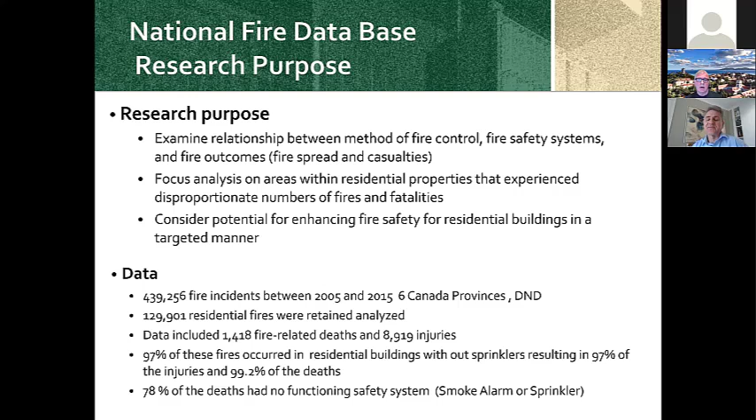The National Fire Database, for the most part, the data dictionary, a high-level report, and a sustainability plan for the next steps of the project, is on the Canadian website for Statistics Canada and can be downloaded. If there's interest for access to that later on, I can share that with Boris based on the questions.

So what we're talking about here is large wood frame residential buildings. In 2009, the province of British Columbia adopted and advanced a building code amendment to allow 4 to 6-story wood frame construction. And in 2015, the National Building Code of Canada adopted a similar code to allow up to 6 stories in wood frame construction.

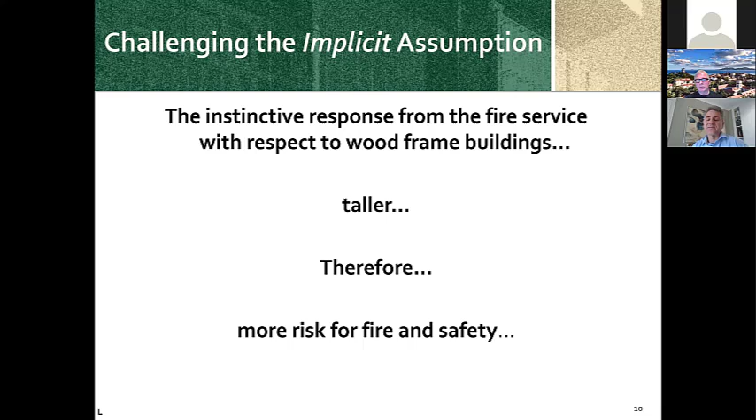So we were challenging the implicit assumption: the instinct from fire services was that because wood buildings are taller, they're going to be more risky in terms of fire safety.

We brought out three perspectives: what the developer sees, what the community sees, and what the fire service's concerns were when these code changes were adopted.

What the developer sees is these massive, big footprints of construction. Some of the benefits, and why British Columbia advanced this type of construction, were to bolster its wood industry through greater use of wood. It's one of our natural resources and represents a large share of employment, export revenue, and construction in the province. They wanted to stabilize and advance that.

So the natural move was to see these additional two stories added to these buildings. It wasn't actually that new, because in our research we found that in the western portion of North America—Washington, Oregon, and California—mid-rise buildings up to 6 stories had been built for the last 20 years.

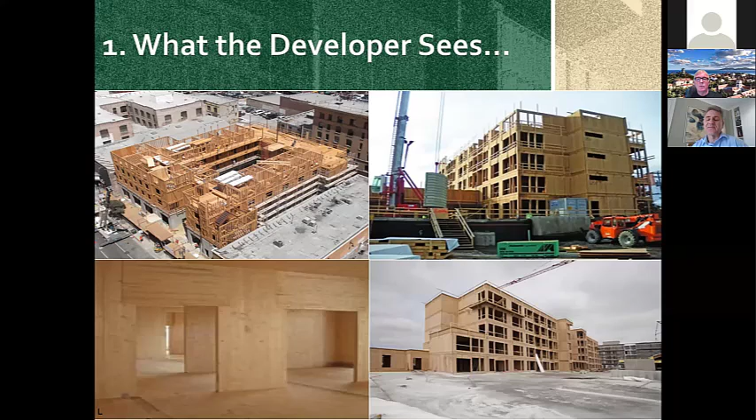We interviewed fire chiefs and fire officials on the Western continent, and for the most part found that these buildings were not performing badly against fire, as had been feared by our colleagues.

Of course, what the public sees is these beautiful buildings that are icons in our neighborhoods. Compact living is becoming very predominant, especially in the lower mainland regions and city cores, along with higher density, greater taxation—this type of living is the future.

Our children need a place to live, and construction is getting very expensive, so this type of approach is becoming more and more commonplace. Since 2015, all of Canada has been accommodating this type of construction.

And of course, what the fire service was concerned about was these massive wood buildings and what happens when they catch fire. The buildings you're seeing here were all under construction, and I'll talk a bit about some of those vulnerabilities.

The one on the left-hand side occurred under my jurisdiction at the time, in the city of Surrey. That long column of smoke in the center is the view I had while driving into work that morning when this fire occurred. It was very challenging, and we have some advice on these types of situations as well.

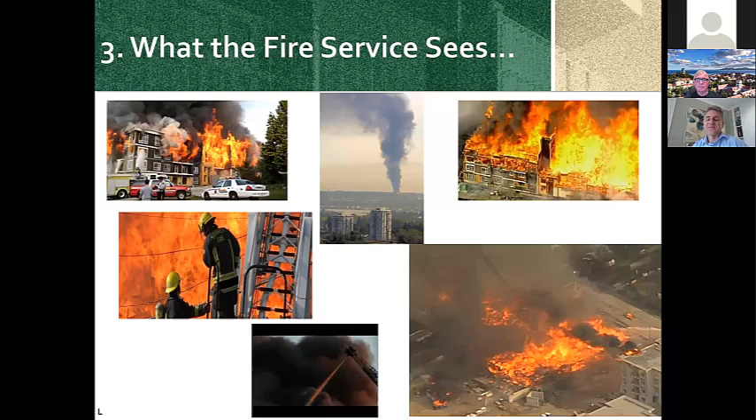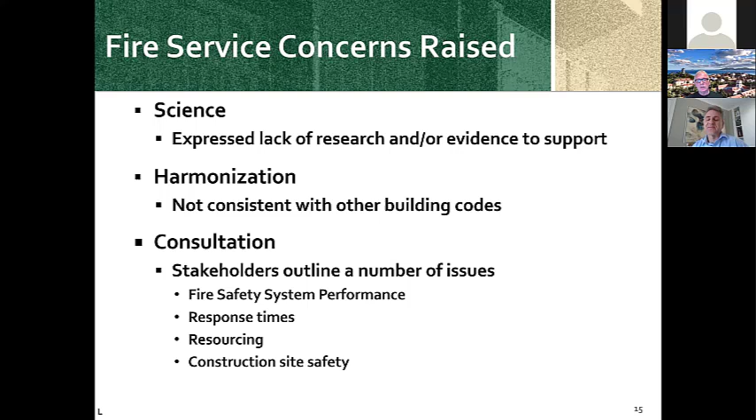Specifically, what the fire service raised in terms of concerns were the expressed lack of research or evidence to support this going forward, harmonization issues—since it wasn't consistent with other building codes—and consultation. They were also wondering about fire safety systems performance, response times, resourcing, and construction site safety.

There were many major changes, but highlighted here are those from 2009 and in the National Building Code of Canada 2015: compartmentalization, fire-resistant assemblies, and one of the major issues—more stringent sprinkler protection.

Now, in Canada, and in British Columbia specifically, I'll talk about sprinkler protection.

There are probably in the neighborhood of about 40 large municipalities, including the city of Vancouver, that nearly 10 to 15 years ago adopted mandatory sprinklers for all construction, including single-family dwellings. There's nearly 40 municipalities over the years that have adopted sprinkler protection. The fire service industry has been lobbying the national building code process for mandatory sprinklers across the board, but they have not been able to achieve that.

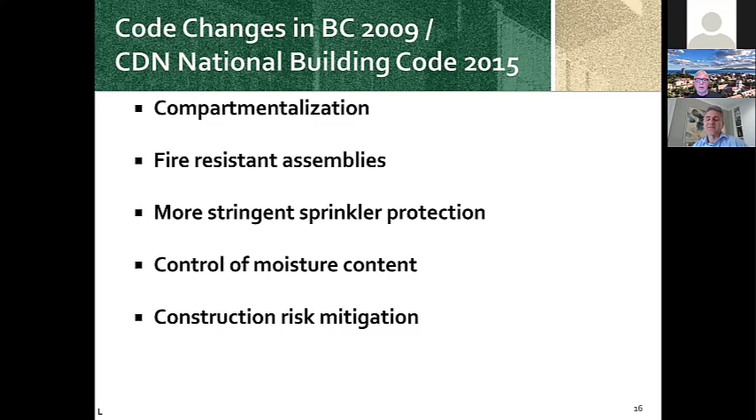One of the big questions that came up in the beginning was, does construction type make a difference, i.e. combustible versus non-combustible? All of these research reports are available on the University of the Fraser Valley's website, and you'll see a link to that at the end of the presentation.

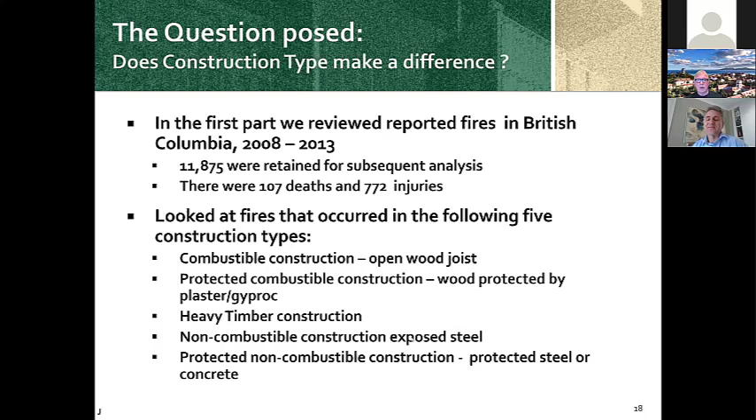In the first part, we reviewed fires that occurred in British Columbia between 2008 and 2013. There were nearly 12,000 fire incidents retained for this analysis, 107 deaths and 772 injuries. We looked at fires in the following 5 construction types identified at the time of the fire in the reports: combustible construction with open wood joist, protected combustible construction with wood protected by plaster or gyproc, heavy timber construction, non-combustible construction with exposed steel, and protected non-combustible construction with protected steel or concrete.

Looking at the nearly 12,000 incidents, we looked at the frequency of fires, deaths, and injuries by general construction type; extent of fire by construction type; frequency of fires, sprinkler protected; smoke alarm activation; injury rate by construction type; extent of fire by construction type and protection type; method of fire control by construction type; fire-related casualties and injury by construction type; and fire-related casualties by construction type in the presence of a working smoke alarm and sprinkler protection, which was the key.

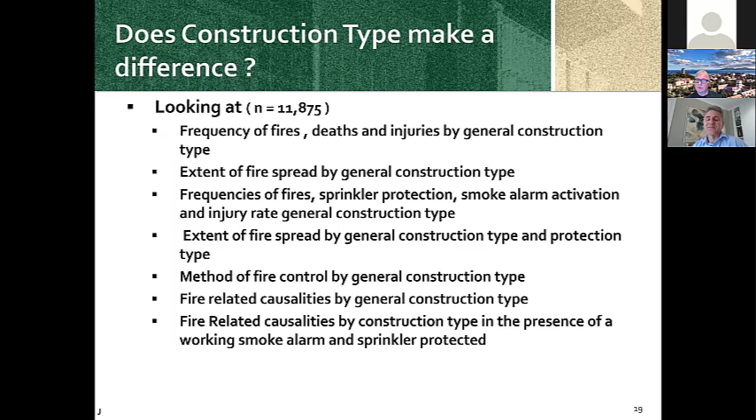When we put all these together and run it in parallel, across all 5 construction types, in terms of fires contained to the object of origin, part of the room, confined to the room, confined to the floor of origin, confined to the building of origin, extended beyond, or confined to the roof attic—every one of those types performed almost identically, with the exception of fires in heavy timber, which were basically exposed, meaning there was probably a little bit less resistance to the fire at the time.

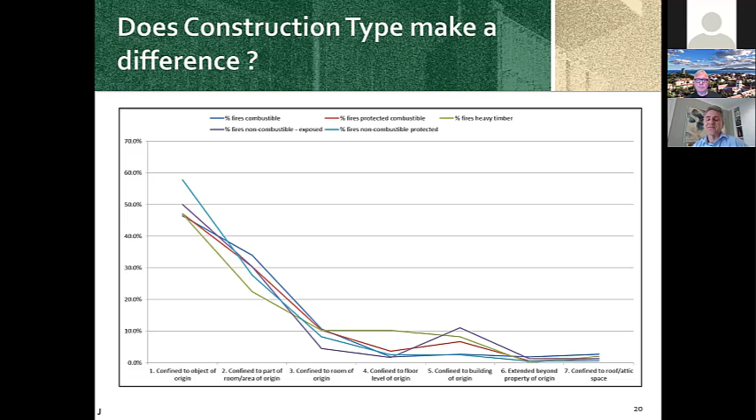When we focus on smoke alarm activated and sprinkler protected fires, there were 865 of those. The first highlighted area was protected combustible construction, wood protected by plaster and gyproc, which was 413 of those—47.7% of the fires, 26 injuries, an injury rate of 63, and no deaths. Protected non-combustible construction, protected by steel or concrete, had 308 of those, 16 injuries, and no deaths.

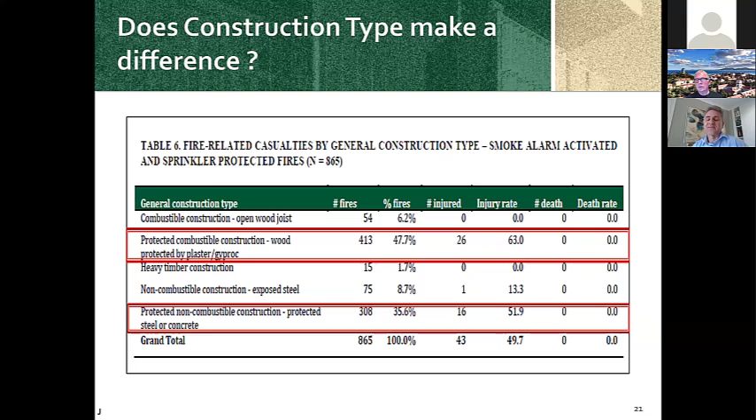So looking at it from a different perspective and comparing the 1 to 4 story fire outcomes as a function of fire protection systems, building protection systems, and construction type, we lined up combustible and non-combustible on the left-hand side of the top, and we said, was there a sprinkler system? Yes. Was there a smoke alarm that worked? Yes.

The number of fires in the combustible environment, there's certainly more of them: 1,558. Non-combustible was 593. The injuries were 99 versus 33, but the injury rate was 63 versus 55. 4 people died in the combustible environment, with a death rate of 2.6. The percentage of times the fire department was called to fully extinguish the fire was almost identical, 22.8 versus 22.9, and spreading beyond the room of origin was 8.7% versus 8.6%.

Now looking at its cousin, the 5 to 6 story buildings—these have been around for about 10 years, so we haven't had a lot of fires—but in a sprinklered environment with a smoke alarm, combustible versus non-combustible: 146 fires versus 103. Number injured was 6. The injury rate was 41.1 versus 58.3. No deaths, obviously no death rate. The percentage of time the fire department had to extinguish those fires was 13% versus 12.6%. Spreading beyond the room of origin was 2.1% versus 4.9%. So already we can see that the 5 and 6 story environment seems to be performing much better.

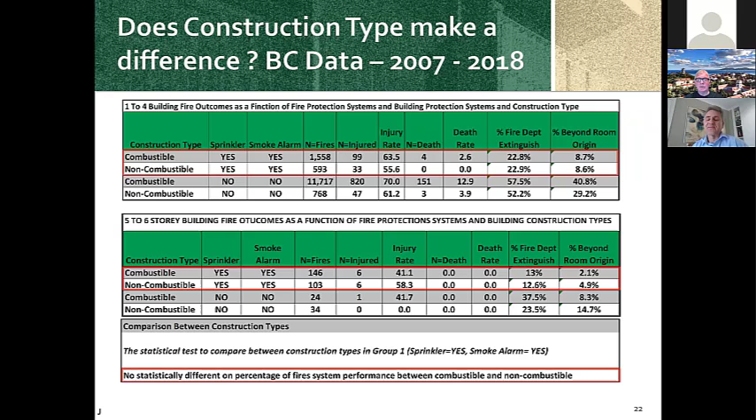So the conclusion, the short answer is: does construction type make a difference? Obviously the short answer is no. We found that casualties by construction type, in the presence of a working smoke alarm and sprinkler protection, death and injury rates were similar. Fire spread was remarkably similar with no distinguishable differences between construction type. Most fires were confined to the room of origin.

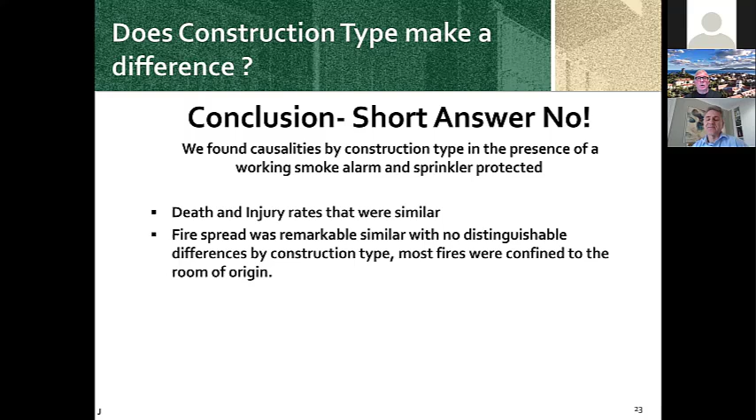So once again, challenging the assumption, two comprehensive studies were done, which are available on the University of the Fraser Valley's website, cjr.ufv.ca, and you can download them for free—they're good reference material.

Now looking at the Canadian perspective and deaths per 1,000 in all residential fires and the fire rates, once again we were looking at working smoke alarms and sprinkler systems, whether full or partial. On the left-hand side, we're lining this up: was there a smoke alarm and a sprinkler system, no smoke alarm yet a sprinkler system that worked, just a smoke alarm and no sprinkler system, or nothing operating at the time. As I mentioned, we're woefully lacking in Canada in terms of maintaining smoke alarms.

We'll follow this through on the top line: smoke alarm working and sprinkler system working. There were 2,054 fires. Injuries were 169, injury rate 82.3. There were 6 deaths, death rate 2.9. 33.5% of the time the fire department needed to put out the fire, and it spread beyond the room 6.1% of the time.

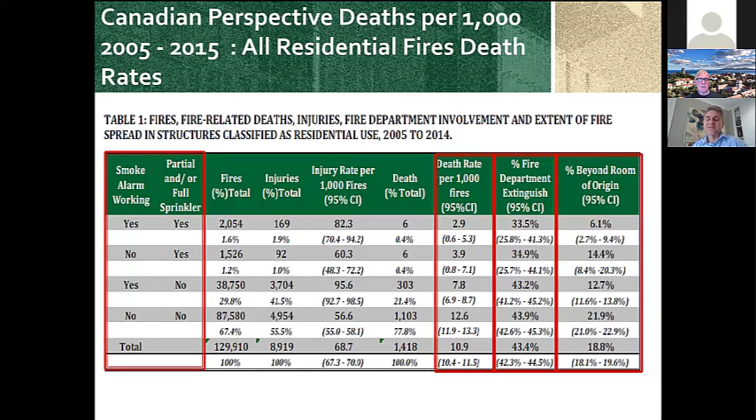So it's a good proxy of how the systems are going to function, and we can predict the future on how that's going to work. Looking at this a different way, as a bar graph showing how it graduates: the death rate with a sprinkler system and a smoke alarm is 2.92, just a sprinkler system is 3.9, a smoke alarm only is 7.8, and when there's nothing functioning at the time, it's 12.6.

The death rate risk reduction is 38% probability with a working smoke alarm, 69% with a working sprinkler system. Combine the two, 77%.

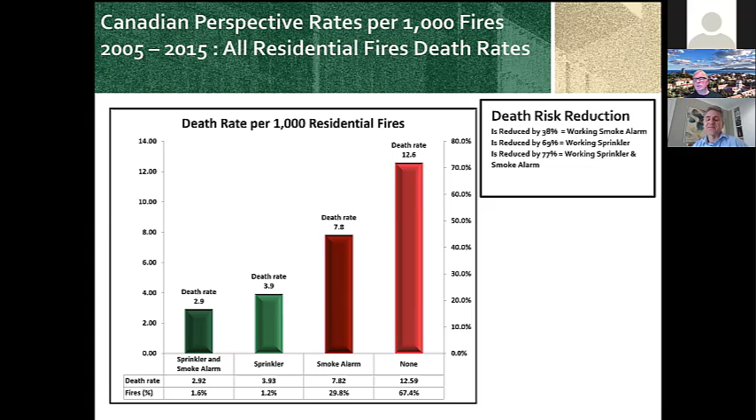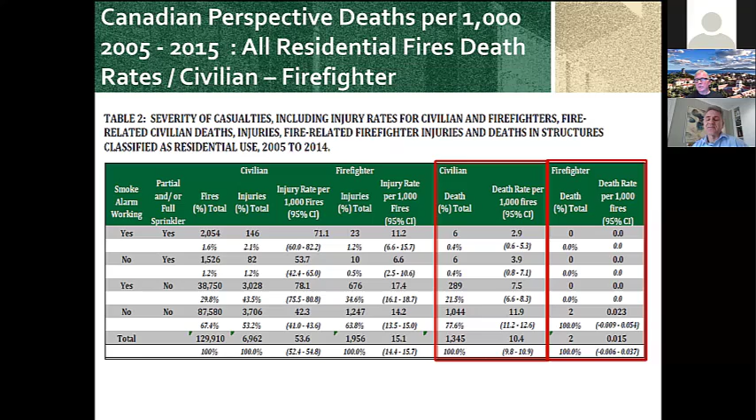When we looked at just a sprinkler system, it was similar, but 3.9 as you've seen before. Focusing on the firefighter side in terms of injuries or deaths, certainly one death is too many for the firefighter industry. But when there were no systems in play, we had 2 firefighter deaths under that set of circumstances.

Looking at the Canadian perspective in terms of the percentage of fires that spread beyond the room of origin: in a smoke alarm and sprinkler scenario, 6.1%. Sprinkler only was 14.4. Smoke alarm only is 12.6. And when there was nothing, it was 21.8.

You might be asking yourself, how is it that a smoke alarm outperformed the sprinkler system? The best answer is that the smoke alarm is probably going to activate and alert the person at home quicker than the sprinkler system would have gone off. With a working smoke alarm, there's a chance the resident or individual at home is going to intervene with that fire prior to it breaking out and causing damage or activating the sprinkler system.

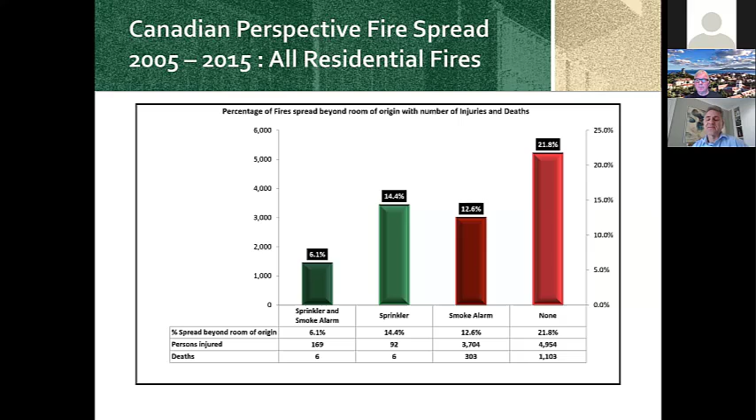We also know under this set of circumstances what the severity of those injuries were, both civilian and firefighter, under circumstances of a working smoke alarm and sprinkler system being present—whether the injury was minor, 1 day off; light, 1 to 2 days in hospital or off work for 1 to 15 days; or serious, 3 days in hospital or off work for 15 days. We recorded from that database what occurred.

There were 6,927 civilian injuries that we could calculate with this cross-referenced information, and there were 1,956 firefighter injuries. You'll note that under the yes scenario, for civilians there was 80, for firefighters there was 10, and when we get to the no-yes scenario, there were 7 of those cases.

In other words, in terms of no smoke alarm and a working sprinkler system, and under the circumstances of a smoke alarm working, yes, and a sprinkler system working, no, it was 549 injuries. And when we get to no sprinkler system and no smoke alarm, 971 firefighters.

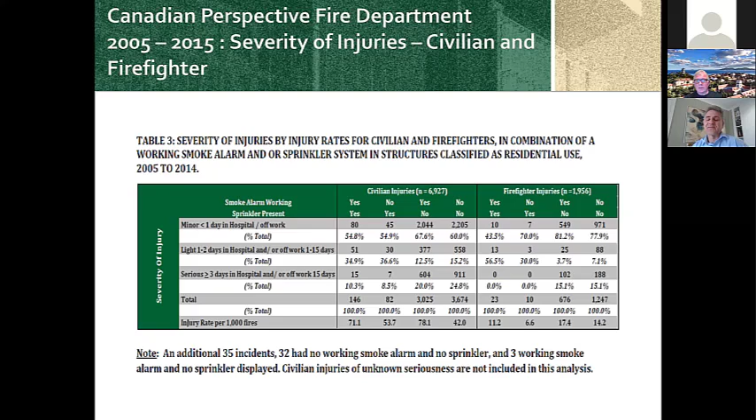Now we're looking at a graduated lineup of all residential buildings protected by sprinklers, apartment buildings protected by sprinklers, and single detached buildings that had fires—there were 199 of those.

Starting from the left-hand side, the best case scenario, fire confined to the object of origin, confined to part of the room of origin, confined to the room of origin. When we get to the area where it's confined to the building of origin, and compare that to the unsprinkled environment on the right-hand side, we see a much different picture in terms of the number of fires actually making it to being confined to the total building of origin, or even extending beyond the building of origin or into the roof areas. There's obviously a significant difference showing up in terms of what you can expect in outcomes.

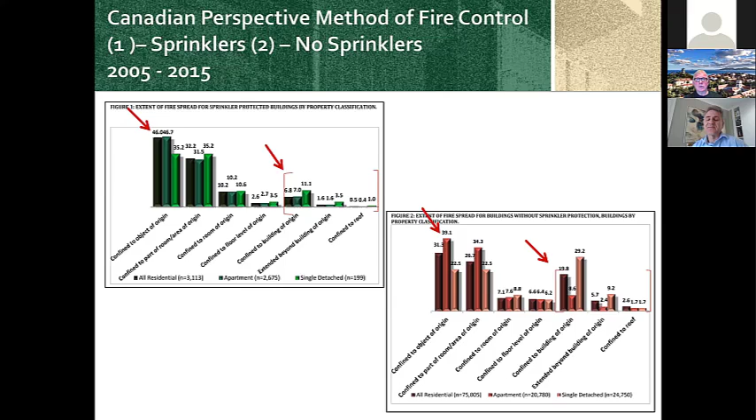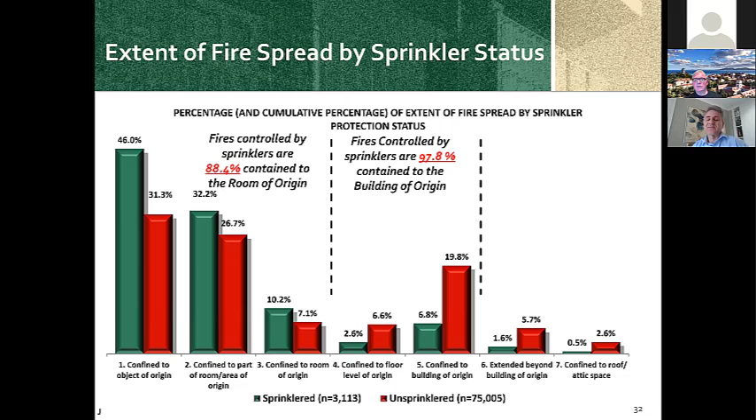So lining this up in terms of cumulative percentage and extent of fire spread by sprinkler protection status: 88.4% of fires controlled by sprinklers are contained to the room of origin. Fires controlled by sprinklers, 97.8% are confined to the building of origin. Only 2.1% of fires with sprinkler protection extended beyond the building of origin, compared to 8.3% of fires without sprinkler protection. So your best odds, obviously, are with a sprinklered building.

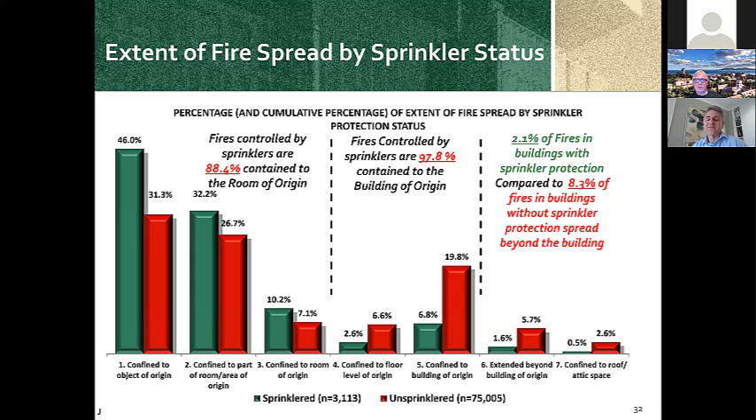The next thing I wanted to focus on is construction fire safety, which is an incredibly big issue. A lot of us have had experience with what occurs in buildings under construction. They're very vulnerable, and the best prevention is to not have a fire at all, because once these fires get started in buildings under construction, they're likely to burn to the ground.

Both these documents are reports: one on best practices for construction fire safety, an accumulation of research from North America, Europe, and England, and on the right-hand side, construction fire response, a guide to fire services to help them make corporate decisions on how they're going to manage these fires if and when they occur.

These buildings under construction go fast, and I can tell you there's probably no safe place for a piece of apparatus or a firefighter to approach them when they catch fire, because they are incredibly hot and burn incredibly fast.

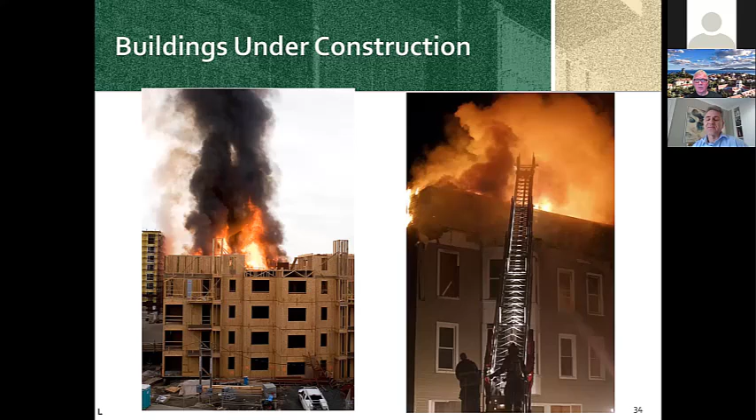We had construction fire safety plans in the City of Surrey at the time of the fire I pointed out to you, just past 2009. It was a catastrophic event, and we learned a lot from it. From that perspective, we bolstered our construction fire safety plans and our requirements under the fire code, and instructions to developers on how they were going to manage these buildings while under construction.

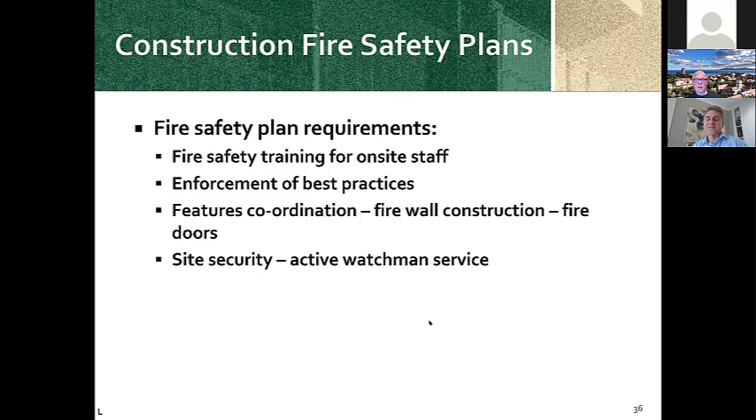Fire safety plan requirements, in essence, require training for all on-site staff and enforcement of best practices—our prevention and operations staff visit these sites periodically to make sure they're being adhered to. This includes coordinating firewall construction as soon as possible, installing fire doors where possible that are either fused or appropriate to be closed, and site security, requiring an active watchman service—somebody there all the time, 24/7, patrolling the area, ensuring best practices are followed and that they know who's coming and going and that the site is secured.

Retrospectively, the leading causes for these fires under construction were incendiary or suspicious events, as I mentioned with the fire we had in 2009.

In North America—I'm not sure about Australia—there was quite a severe dip in the economy. The building you see below was under construction. The fire occurred at 10 o'clock in the morning, in two places on each side of a firewall almost simultaneously, so that was likely a suspicious event. That project was extended by an additional two years, so you can imagine individuals working on that building got an extra few years of work during a really depressed economy. I can only allude to what I think happened, because we were never able to prove anything.

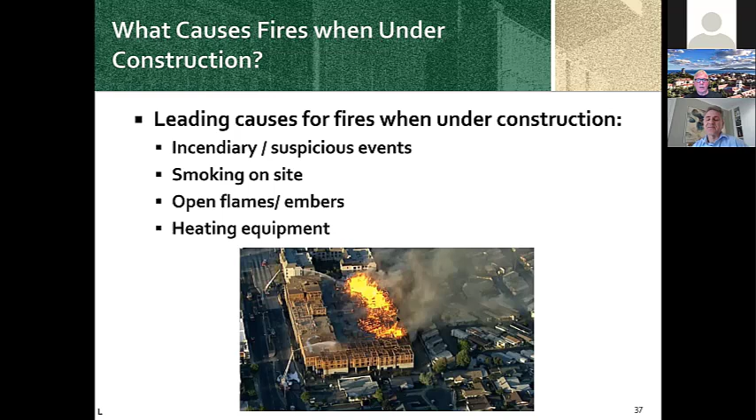Smoking on site is a big issue, and of course we prohibit that. For open flames and embers, we require a hot works permit from building supervisors to ensure whatever hot works is being done is monitored. Heating equipment used for drywall or plasterboard also needs to be supervised.

Some new ideas came up a few years ago in Alberta, a product of wind-driven fires in Edmonton. A subdivision under construction had 200 or 300 buildings in various stages of framing, and a fire broke out with a very large prairie wind, taking out about 100 or so houses under construction. An entrepreneur, a chemist, came up with a polymer, which you can see on the right-hand side.

In this particular application, they're putting the polymer into apartment buildings to basically reduce the risk associated with costs for supervision and a few other things.

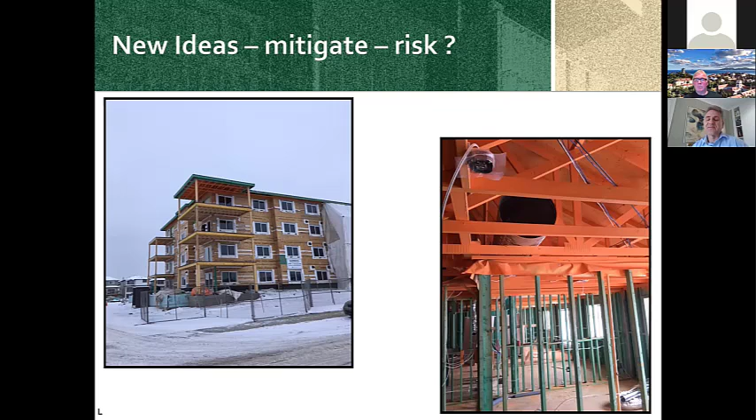And it's a polymer that gets treated on the wood prior to it being constructed. It's a new idea, very new, but if we're considering levels of risk or reducing risk, this might be one way to do it.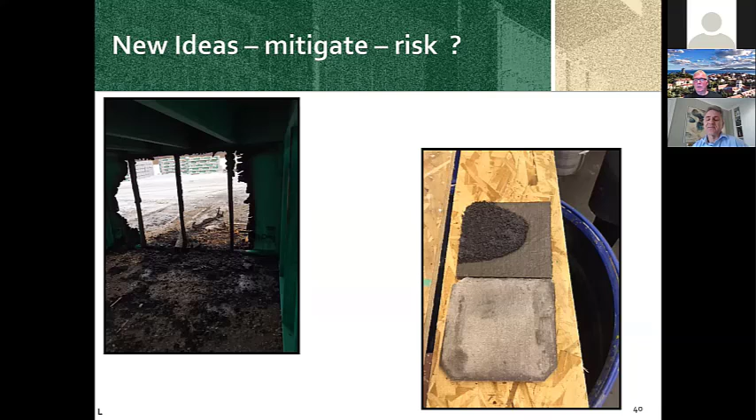And this polymer, basically what it does, it swells. It creates an insulated blanket to absorb the heat, and essentially it works quite well.

But really focusing on fire safety plans, in our case it's administered by the fire services and building officials, and it has to be operated by the owner or the developer. They are responsible for adhering to the fire safety plans. I'm sure you have various different renditions, but I can always make samples available if necessary.

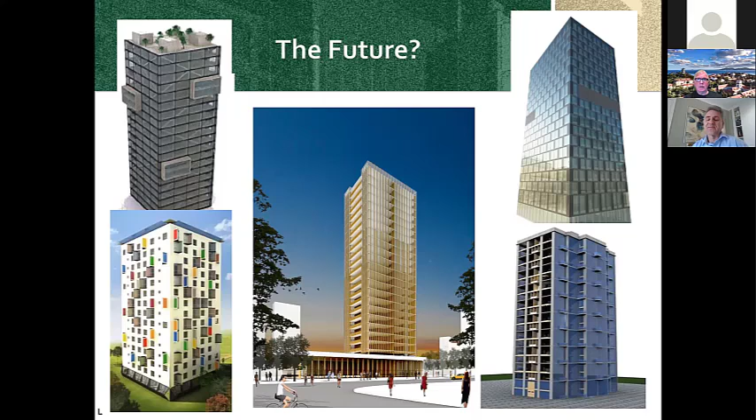So the future of this, where this is going, is obviously CLT. I think Australia, Melbourne - the first one I ever saw being constructed was around 10 stories. It was in Melbourne. And of course it's caught on in British Columbia this year, and in Canada we'll see the National Building Code adopt up to 12-story mass timber construction.

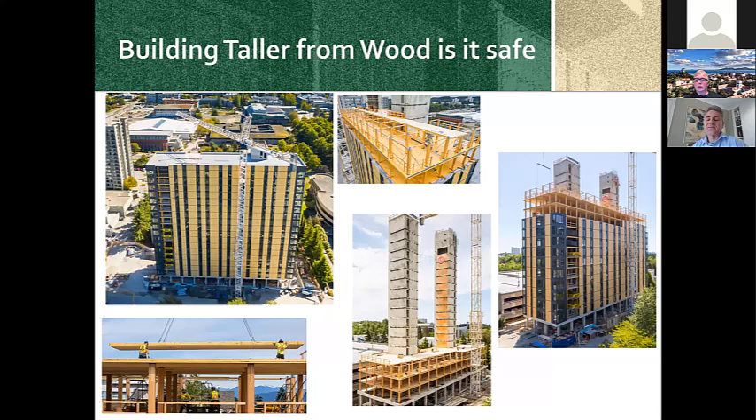And of course, is it going to be safe? This particular project was the Brock Commons. It was, I think it still is, maybe one of the tallest hybrid CLT buildings in the world - 18 stories. I had the privilege of serving on the fire safety assessment team for the building code process in British Columbia for its approval, and it was a pleasure to see this thing going up. It went up like a Meccano set, very, very quickly - less than several months for construction. Of course, filling in took much longer, but it went up quite famously.

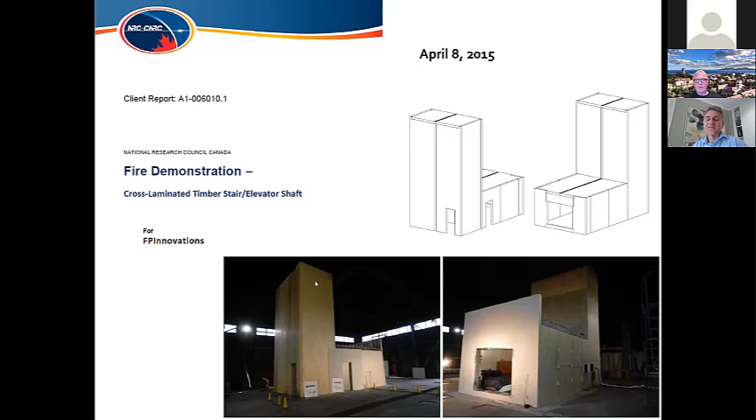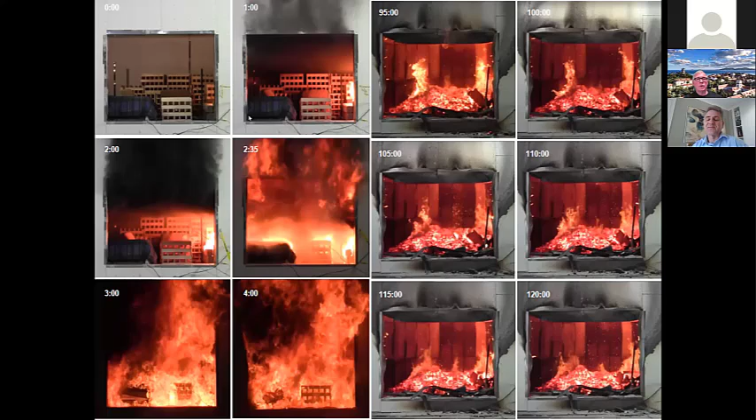And it was demonstrated by some testing done by the National Research Council of Canada and FP Innovations. This test was an elevator shaft and an apartment adjacent to it. Basically what they did is they fuel loaded it and put drywall in it. It was unsprinklered. Here's the time duration - top left corner shows the fire commencing, and bottom right corner, after 2 hours, the fire essentially burning itself out into coals. So that's really been important for our industry to see how this is going to perform.

Because once again, we have a tendency to be very, very conservative, which we should - that's our job. But the industry also needs to know that we have to make it affordable, and some of the systems we put in place have to make that consideration.

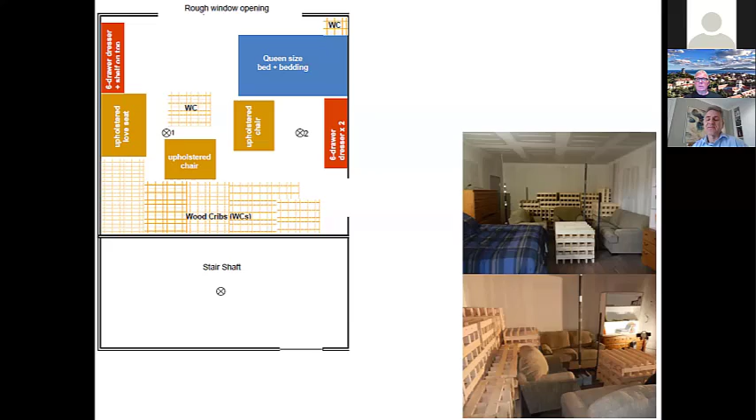So anyways, I just wanted to end with an appreciation for the Canadian Association of Fire Chiefs, the Council of Canadian Fire Marshals and Fire Commissioners of Canada, and the Defence Research and Development Canada and Public Safety Canada for funding and putting this kind of database together so that we can work through and be evidence-based in our decisions, and look at vulnerabilities in buildings to make sure we're going in the right direction. Also Statistics Canada and the Canadian Centre for Justice Statistics, who curated the data and put this together for us. This size of database is very important to us so that we can make better decisions, so that they're safe. Public safety and firefighter safety is paramount, but also making sure it's affordable.